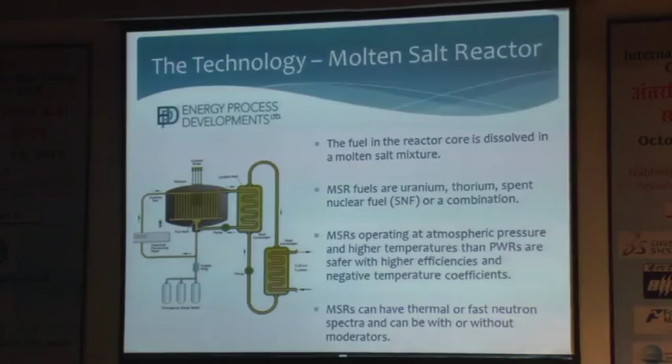But before I go any further, most of you should know what a molten salt reactor is. Just briefly, for any of those of you who don't, this is a very generic molten salt reactor here, actually from the Generation 4 forum website. The fuel salt is a liquid and circulates through the core, typically in a graphite moderated core, but that changes. As the fuel is liquid, you don't have a meltdown. That accident scenario just doesn't exist. It operates at higher temperatures, so you have higher efficiencies.

Most of the fission products, the troublesome ones, the gases, bubble out naturally. You can assist that with the various reprocessing techniques. And you can use various fuels, plutonium, thorium, uranium. It's quite flexible and diverse. All of these benefits bring one main thing, and that's it can be a cheap technology. The cost estimates at the moment come out on par with coal, and that's what's really revolutionary here about this.

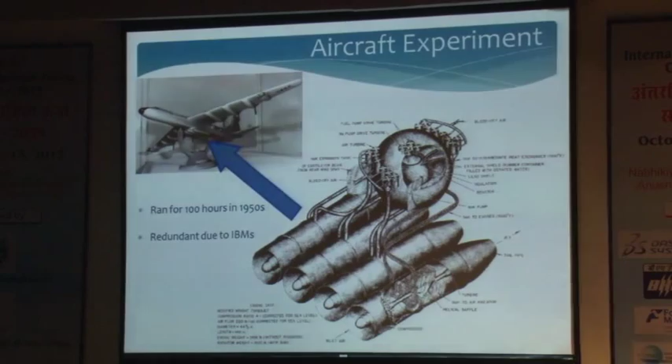If it's so good, why isn't there one? It's the question most people ask when they hear about it. Well, there has been. The very first one was a molten salt reactor built by the US Air Force. It was built for an aircraft, ran for 100 hours successfully on the ground, and they built it to go up in the air. It was a ludicrous idea, so thankfully it didn't actually take off. Flying radioactive liquid above your heads, not great. Thankfully, not thankfully, but the intercontinental ballistic missiles were invented that stopped that.

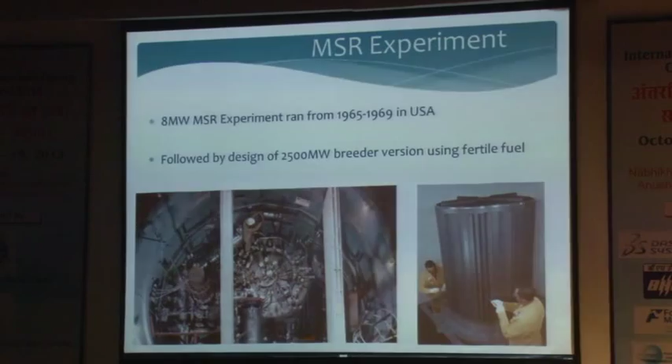Unfortunately, this stopped around the same time as the American project stopped, and effectively nothing happened until really 2002. In the Generation 4 forum, molten salt reactors were chosen as one of the 6 configurations for future development.

So the first step, our feasibility study, was a year-long study funded by a UK government grant. We'd look at various MSR configurations, so it's not research and development specifically. We'd look at the licensing regime, look at various sites in the UK, and carry out a public opinion poll on advanced nuclear. We also wanted to have a look at the role of a prototype in the UK.

First step to do all this was to gather a team, so we had quite a strong supervisory panel. Professor Derek Fray, Director of Research at University of Cambridge, Professor Paul Madden, chemist and Provost of Queen's College, Oxford, and Dr. Geoff Parks, Senior Lecturer in Nuclear Engineering at University of Cambridge.

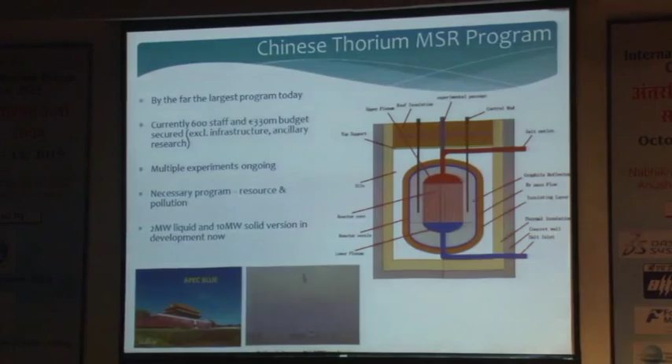So the first step after that was to actually look at the MSR scene internationally, and obviously this is led by the Chinese. They have a program going on, about €330 million with 600 staff. As part of this study, I went over to visit the researchers there in March, and you can really see in Shanghai the pollution affects life.

If you look in the bottom left here, you can see the blue photo, very nice. It was taken when they shut down all of the dirty factories around Beijing for the APEC conference. On the right is a photo of a normal week. The Chinese need thorium molten salt reactors. They need clean fuel. They have to do something about it, and that's why they have this large program.

It's not going as quickly as they planned. Their staff are very young. Out of the 600 people, the average age is 31. But they're really trying to get the basics and then move forward. There's a lot of collaboration going on with the United States at the moment. The Chinese are looking for a 2 megawatt liquid prototype first, along with a 10 megawatt solid version, which is in development now. And the collaboration with the States is on their solid fueled FHR.

We were quite lucky that we managed to park across a no parking sign in front of this building when we got there. And the friendly Americans, instead of saying, get lost, they said, can I help you? So we explained what we're doing and the project, and a couple of minutes later, we had the person responsible for the building take us inside and show us nearly everything except the reactor core. So it hasn't really changed at all. It's left as it was, but we saw how simple it was.

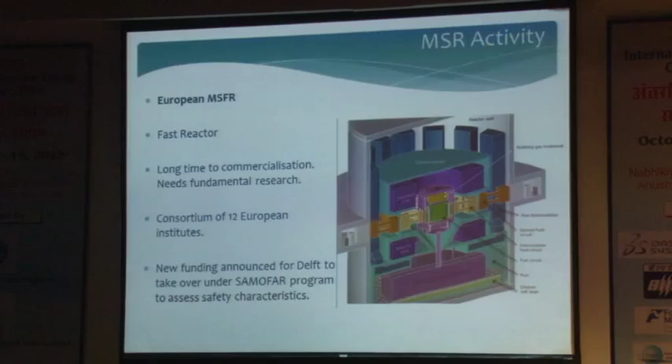Some of the other activity internationally, we heard a bit about the SAMOFAR program and the molten salt fast reactor. I won't go into that any further. But then we shortlisted 6 designs. These are really the commercial designs. So we'll have a look at a couple of them. Many of these guys are here, speaking today and tomorrow.

Oops, hold on. This here has a lifespan of 7 years, so they don't have to worry about lifespan of the moderator and some of the key components. They can just replace that. It's low enriched uranium with a graphite core, and they're based out of Canada, looking to get an inactive prototype up and running pretty soon.

Next is Transatomic Power. These guys are based out of MIT in Boston. They are really sort of a .com model. Their reactor works in the thermal epithermal region, and the big difference with this is their moderator is zirconium hydride. They see a lot of benefits with that, particularly when you mix uranium and spent nuclear fuel with the plutonium, as we heard, I think, yesterday, the benefits of that.

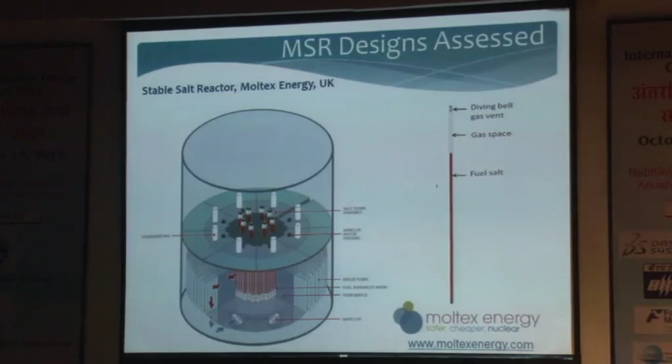Another example is the stable salt reactor from Moltex Energy. That's a pool-type reactor that operates in the fast spectrum. And the big difference here is the fuel is a chloride salt which is static. So it's not pumped, it's in fuel tubes. You can see a blown-up version over there. Again, there'll be a presentation later on about that specifically.

So the process to look at these, to make a short list of all the activity and the designs that exist, because there's a lot of them around the world, we needed to have a molten salt as fuel and coolant. Some configurations just have a molten salt as coolant. They needed to have a commercially active team to actually do something and get a pilot scale plant built, particularly in less than 10 years is the restriction.

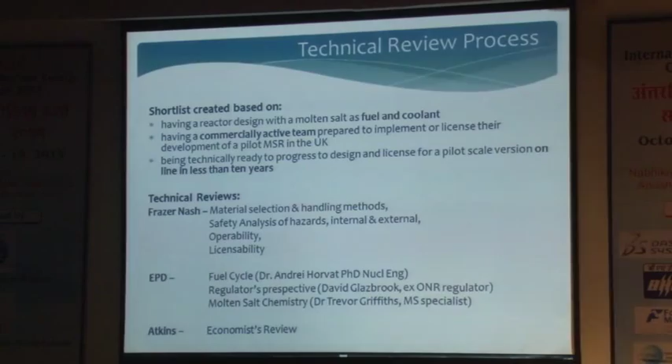The technical review, most of it was done by Frazer-Nash Consultancy. They looked at material selection and handling, safety analysis, operability, and the big one is licensability. Most of the interesting review came from that section. Some of our team looked at the fuel cycle. There was our nuclear engineer, Andrei Horvat. From a regulator's perspective, there was David Glazbrook. The molten salt chemistry was done by Trevor Griffiths. He's the one who worked on the experimental reactor.

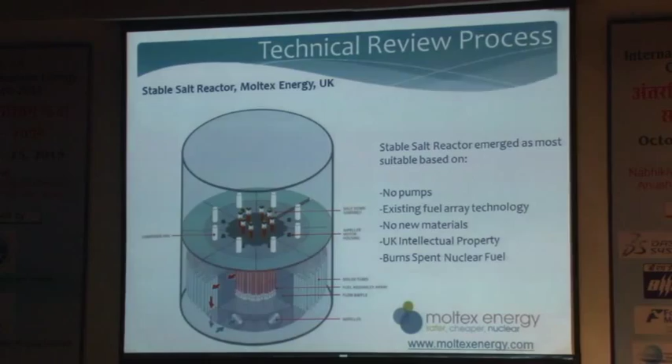What emerged out of this was the Moltex stable salt reactor came out as most suitable for UK implementation based on a few reasons. There's no pumps, so for engineering design it really is a lot simpler. It uses existing technology because they're fuel tubes. It's got a lot of similarities with today's reactors. It doesn't use new materials, so it can use existing steels from the nuclear industry. And what's relevant to us is it's UK design, so it's UK intellectual property. And then again, relevant to the UK is it can burn spent nuclear fuel very efficiently.

Other things that are relevant from our study that we picked up at our regulatory review: the UK actually is quite good for looking at a new innovative reactor design. It can happen there as opposed to other countries where it can't. But obtaining a new site license is a lengthy procedure which you really want to avoid. So we've specifically looked at existing sites. A process does exist for experiments in the UK, but there haven't been any experimental reactors since the 70s, so that experience just isn't there.

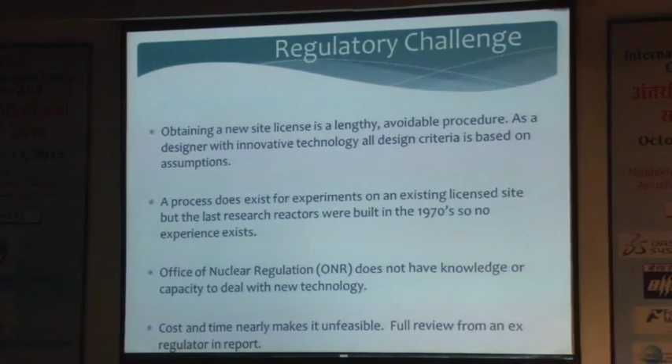The last reactor that was built was in the early 90s, the pressurized water reactor. And then the ONR, there are new PWRs, LWRs being built in the UK, so ONR are busy, basically. They don't have the capacity to deal with these new challenges. The main reason why an innovative reactor would nearly be unfeasible in the UK, but the final conclusion was that it should be done as fast as possible.

Some other, let's say, obstacles, mostly relevant to the UK. The Environment Agency, it's a lengthy procedure, but relevant. They work hand in hand with ONR. If it's under 50 megawatts, it's a local planning process, which would simplify things.

The Department of Energy and Climate Change, need a justification for any new radioactive substance. You need a decommissioning funding plan. Particularly relevant for liquid fuels, you need IAEA agreement for how to monitor the fissile movement, and then you'd need cooperation from WANO and the operators generally.

Looking at economics, the National Nuclear Laboratory looked at small modular reactors being comparable with the new PWRs, Hinkley. The costs are £84 per megawatt hour, which is close to the strike price at Hinkley, £92.50. MSR vendor capital costs are really coming out quite affordable. They're coming out comparable with coal from several of them, depending on the design, at £2 a watt. That's what's really going to change the scenario here. This is affordable, and the technology is ready basically now without further science.

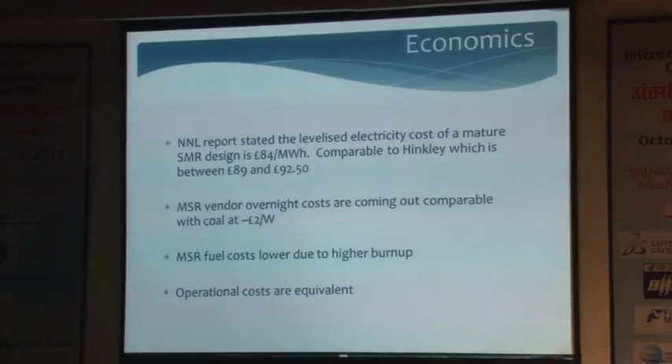Also, MSR fuel costs are slightly lower due to the higher burn-up. Not that relevant because nuclear fuel is cheap. And then operational costs are pretty similar.

Just briefly looking at the public opinion in the UK. So we did a survey of over 1,000 people across the country, and there were some interesting new conclusions. 21% prefer new nuclear of a known technology, as existing technology, and 36% prefer technology that challenges the old. So effectively, you could say that's the Gen 4 sector. You could see that as 57% in favor of new nuclear.

Another interesting one is 23% have actually heard of Generation 4 technology, which we were quite surprised about. But 73% believe they need more information. That really enhances the point of a need for a prototype. People need to learn about the technology, the molten salt characteristics, and we believe the first way to do that is get one built somewhere.